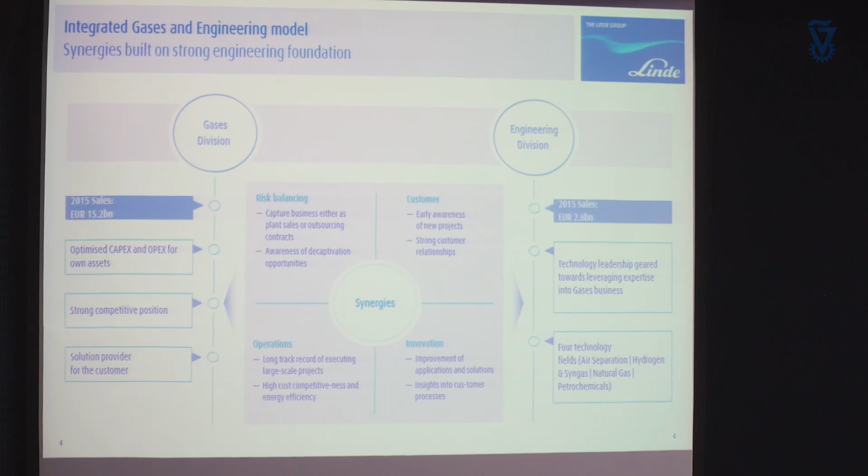And we are, of course, able to tap into the operating experience of our big brother or sister, Linde Gas. Linde Gas has hundreds of plants in operation. And of course, this is a huge data source where we can tap in and take solutions and input for our engineering business.

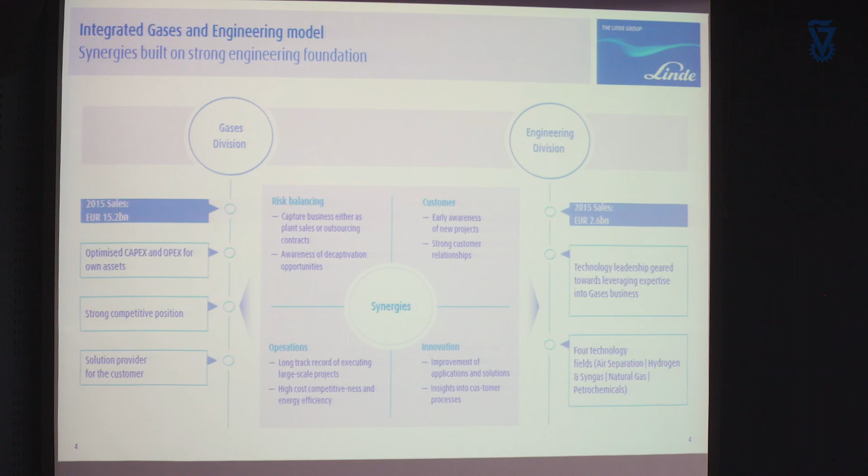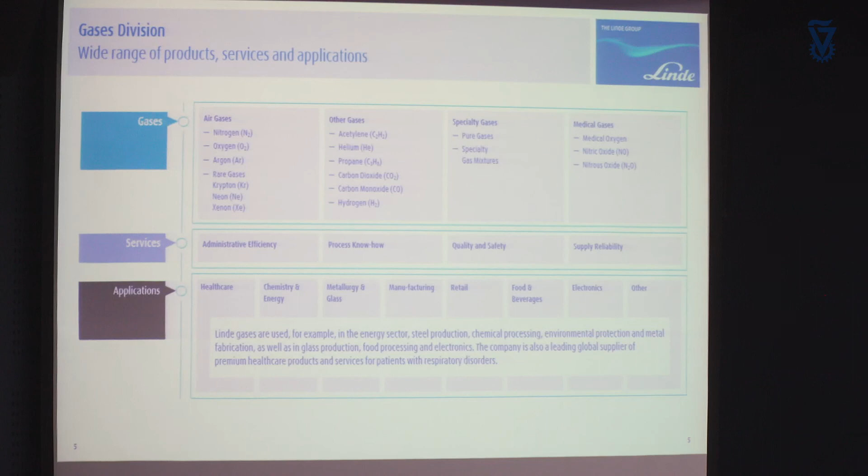Now, it's not only about producing industrial gases, all kind of gases, air gases, gases from hydrocarbons, rare gases, specialty gases, healthcare gases. It's the whole span of the value chain from the gases to the gas applications, which Linde Gas is doing. And you can see here the applications are in all kind of industries: health, metallurgy, petrochemical, and so on.

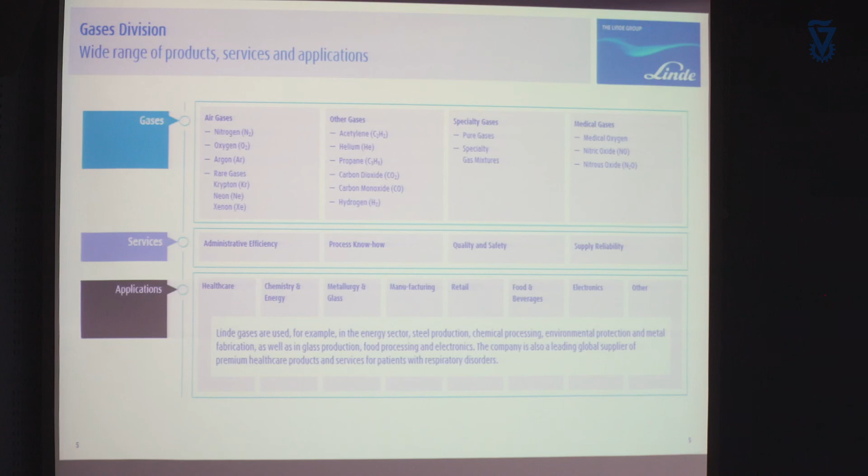Linde Gas has a special department which is continuously working with the customer to find applications for industrial gases in order to improve the manufacturing process of the customer. And these machines, these apparatus to apply these gases, are also part of our business.

Now let's talk a little bit about Linde Engineering, where I'm coming from. We have in Linde Engineering 4 major product lines. This is air separation, Gideon mentioned it in the beginning. This is actually where we're coming from. Professor Dr. Carl von Linde invented the cryogenic process for separating the air gases. Then we have hydrogen and syngas. This is where I'm coming from, mainly hydrogen, but all kind of syngas applications, gas conditioning, and ammonia is also part of it.

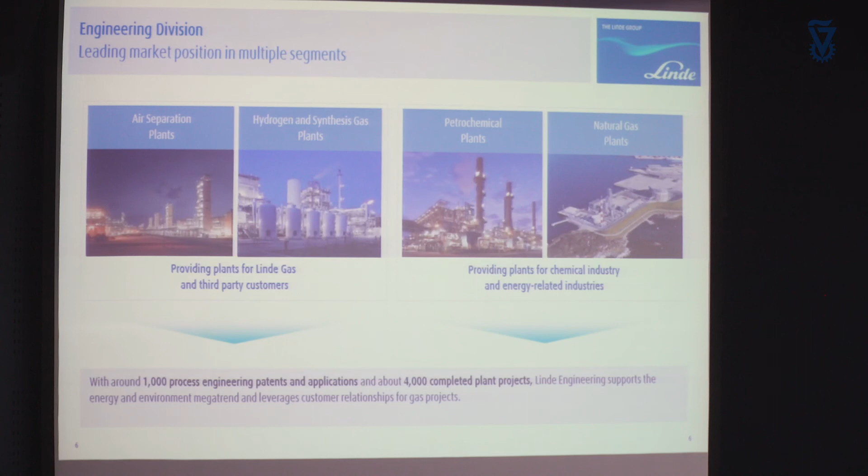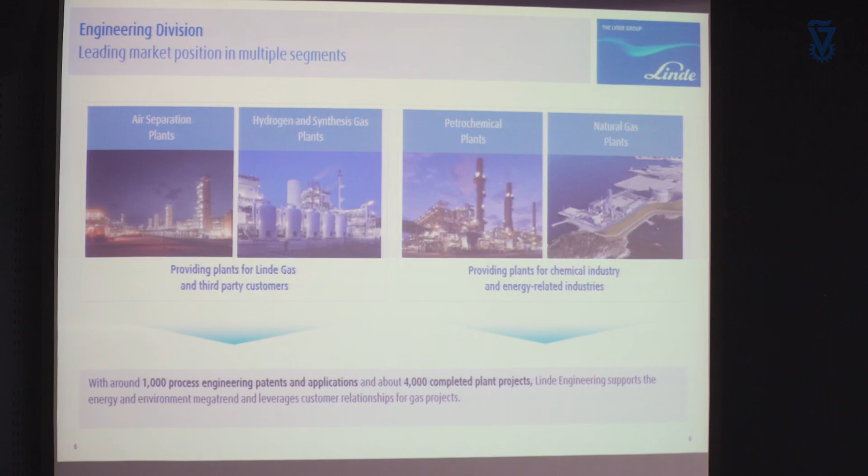Then petrochemical, and our natural gas division doing all kind of gas processing plants, natural gas to liquid, natural gas liquefaction, and so on. We are holding a lot of patents, and we can look back on about 4,000 executed projects over the time of our existence.

Now, what is the speciality of us as an EPC company? EPC, for those who are not familiar with this expression, is engineering, procurement, construction, meaning a general contractor for building plants. What we are proud about is we are not only an EPC company, we are also a technology EPC company.

For a lot of the plants we are building, we own the technologies ourselves. Where we don't own it and we have to find an integrated solution for a huge application, we have access to licensed technology, and we are open to work with each and every licensor. You will see a few examples later on.

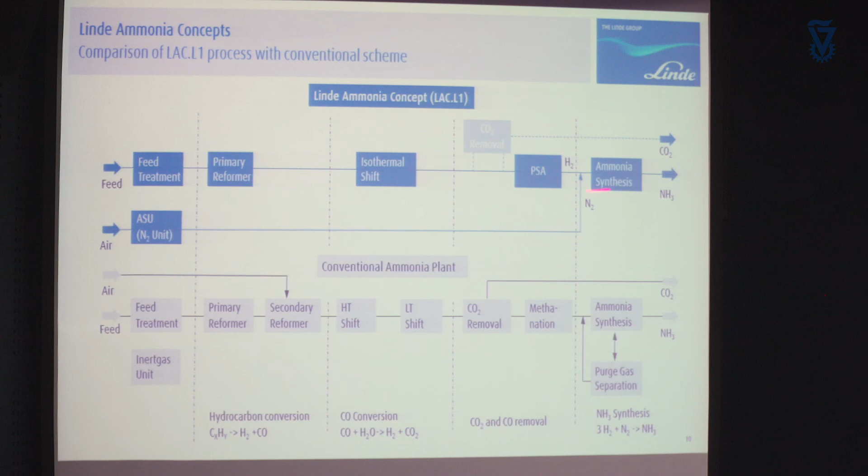Then another nice feature here is the CO2 removal is not compulsory, because the PSA also takes out the CO2. So the process itself is much slimmer, and a very important feature, we bring together the hydrogen and the nitrogen exactly at the point where it's needed, just upstream of the synthesis loop.

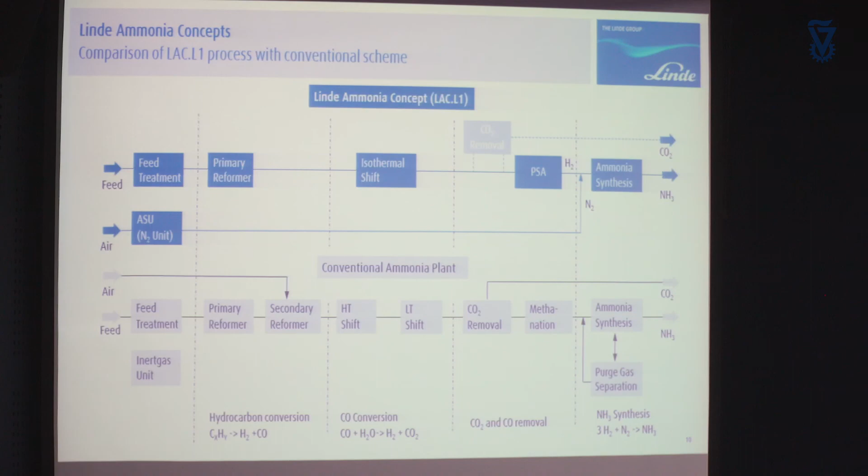Meaning the whole route, of course, has less flow compared to conventional technology. We have less inert gas. We don't have inert gas. It is excess air. What you carry through the whole route, you don't have it here. This means advantage in equipment sizing, in pipeline sizing, of course, and pressure drop. I think we come to that summary later on again.

Well, now I think I have to step down a little bit because I thought I got the monitor here.

Well, the main characteristics, in principle, I said it already. It's an inert-free ammonia synthesis gas. The advantage is we can adjust the CO2 and the ammonia ratio according to the requirements, depending on whether you want to have maybe a CO2 byproduct or whatsoever. It's a very flexible process with respect to feedstock. We can go from very light natural gas feedstock to heavy feedstock like vacuum residue or pitch, for example.

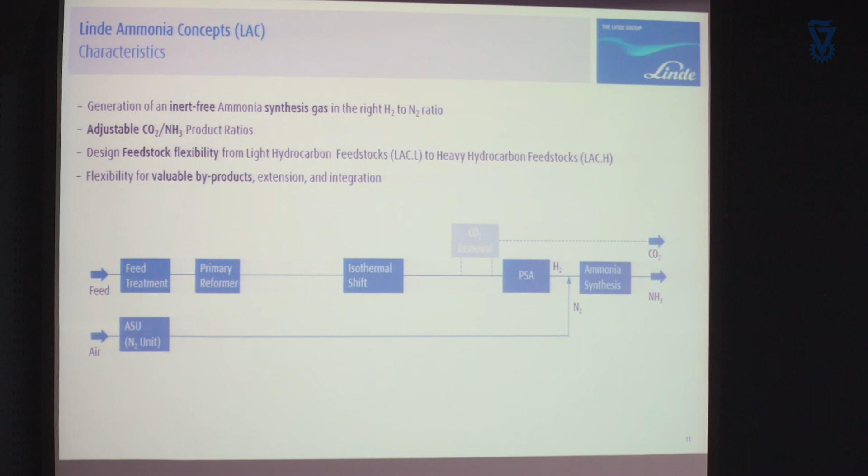And it is very flexible with respect to byproducts, what I want to have. I mean, you see it here. We have the air separation unit. Of course, the air separation unit does not only produce nitrogen. The client, if needed, can also use the oxygen, which is anyway a co-product here. Or we can amend the cold box in order to produce some rare gases. So very flexible.

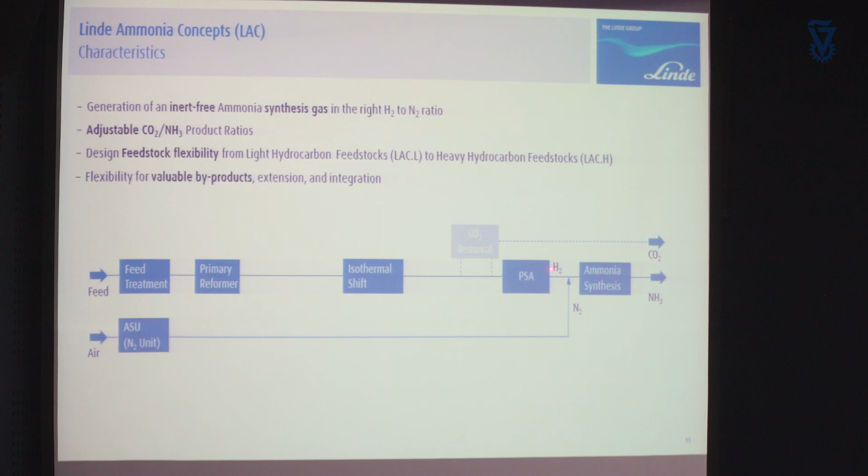Now, with respect to flexibility in plant design, again, CO2 removal, yes, if it's needed. For example, if the client would desire full conversion to urea, we can extract the CO2 and then route it to the urea unit. Pure hydrogen, pure nitrogen, as desired. I said this already. This is in principle a repetition of what I already said.

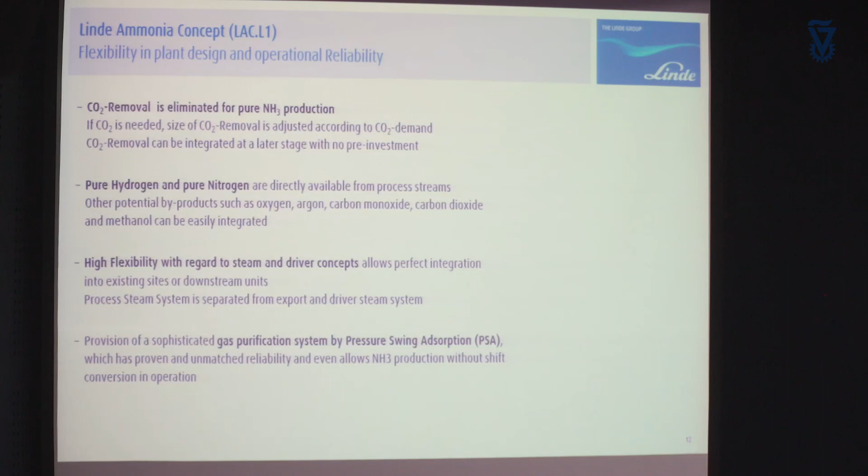The gas purification system, PSA, in our standard hydrogen plant has this additional advantage that you could even run the ammonia plant without the isothermal shift, because the PSA also can take out the CO. And of course, all these features have an impact on cost and energy saving.

As I said right in the beginning, the elimination of three catalytic process steps gives you the advantage that you need less catalyst, about 50% less. This has consequences then, of course, on maintenance, refills, and so on.

The slimmer design of the equipment and the piping, due to the fact that we bring the nitrogen and the hydrogen together just in front of the ammonia synthesis. Less pressure drop, less energy also for the synthesis gas loop. The dimensioning of the machinery is much slimmer than for a conventional plant.

And as a summary, the Linde ammonia concept is the much more direct route to ammonia. So there are savings, the process is very flexible, and of course you have less equipment, less catalyst and so on. This definitely increases the reliability.

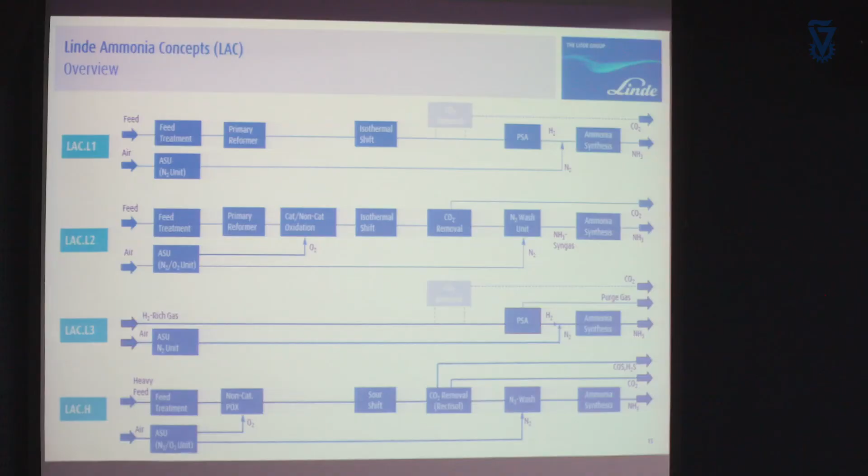Now to give you an overview of the whole family of this process, as I said, we can use it for a huge variety of feedstocks, light feedstock to very heavy feedstock. This L1 process means light 1. This abbreviation is the one we have talked about now.

Then there is the so-called L2 process. If you, for example, want to go to full conversion to urea, there is the CO2 extraction, and there is a second catalytic or non-catalytic step for syngas generation.

Then the so-called LAC.L3 process. This is in principle just cleaning of hydrogen-rich off-gas. This hydrogen-rich off-gas can come from any stream in the refinery, for example, or methanol plant off-gas. This gets cleaned up, for example, by a PSA, and then the hydrogen together with nitrogen goes into the synthesis.

Last but not least, there is the variation with the heavy hydrocarbons. Here, for syngas generation, we are typically with Linde using a partial oxidation unit where we gasify, for example, vacuum residue or pitch, or even coal, of course.

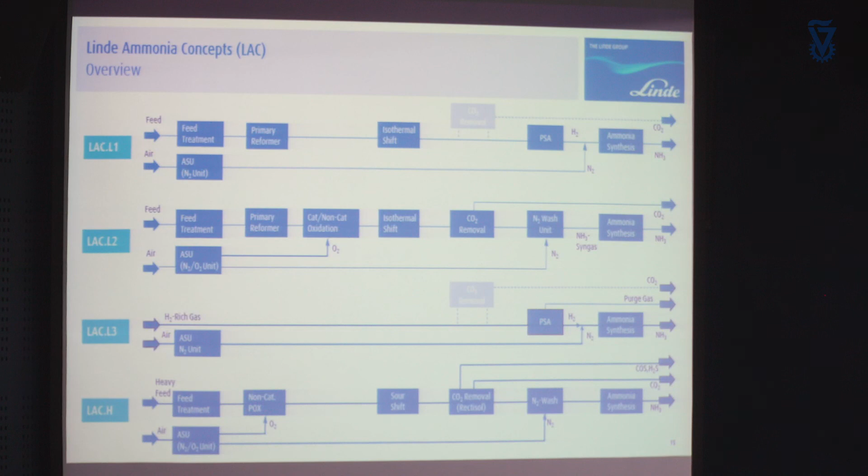Now, to visualize these various process steps, these here are all Linde-owned technologies. Air separation, as we already said, this is where we are coming from, Linde. Then the steam reforming technology is also our own technology, and applied hundreds of times already, for example, in hydrogen plants.

Then the Rectisol wash process is a CO2 removal step, which is typically used in this LAC-H process, meaning for heavy hydrocarbons, for various reasons, but one reason is the pressure level. You have a partial oxidation unit as a front end, which is operating for this kind of feedstock at maybe 80 bars or so, and then in the back end, the Rectisol wash unit is the more adequate process step compared to an amine wash, which we see later on.

Here, a pressure swing adsorption, also our own technology. Then we have here isothermal shift conversion. This is also Linde proprietary equipment. It is actually, how can you say, this does everything. It's a heat exchanger, it's a reactor, it has multiple uses. Sometimes it's used as a reactor, sometimes as a heat exchanger.

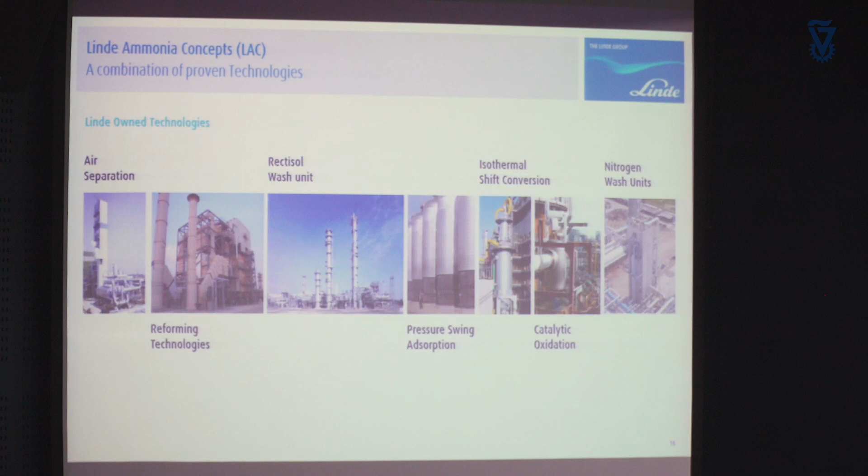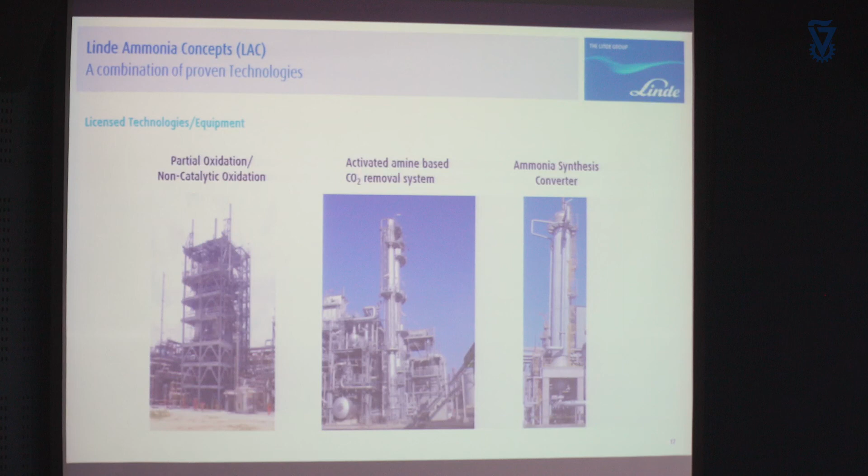Then catalytic oxidation in case of this full conversion, this L2 process. This is something like an ATR, also our own technology. Nitrogen wash unit. This is where we're coming from cryogenic processes. And as I said in the beginning, where we don't have our own technologies, we have access to licensed technology. For example, for a partial oxidation, usually we go with GE, but it could also be somebody else. For the ammonia synthesis, we have worked with Casale, we have worked with Topsøe. We are also open to that. And for the amine wash system, usually also there we can take whatever is and we have worked with whomever is on the market.

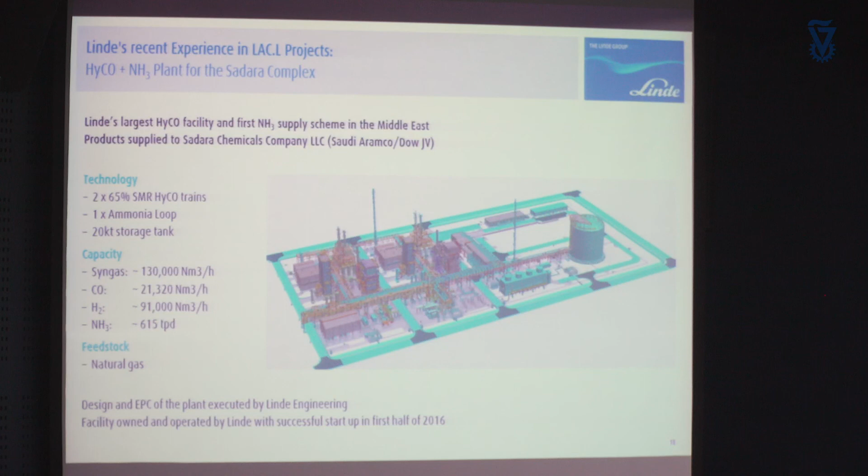This plant you will see later on again. This plant here is stick built. I come to that later. Here a nice picture of it. On the right hand side you see all these units we were talking about before. In principle you have the syngas generation, and here you have the ammonia side of it, the ammonia loop, ammonia reactor, the ammonia synthesis, and the refrigeration, and here the machine house.

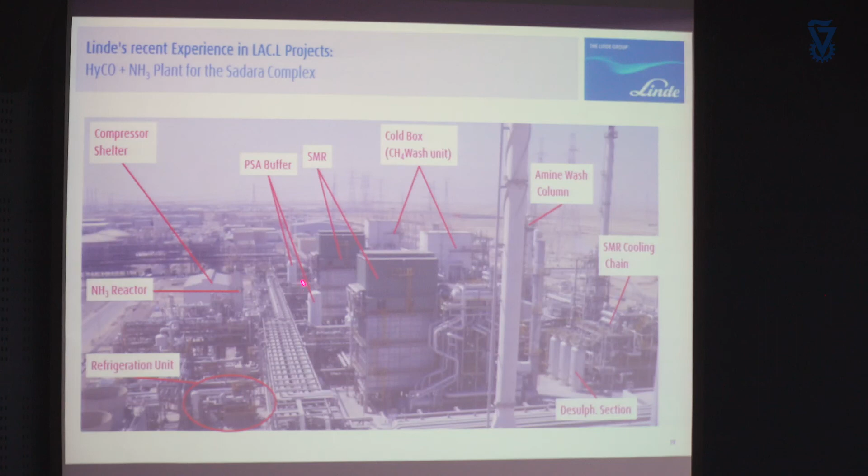Whereas here you have the two big steam reformers, then the two cold boxes of the CH4 wash unit, the towers of the amine wash. This is the SMR cooling chain, so this is where the syngas is cooled down. And here the PSA, you see here just the very tall PSA buffer vessels for the PSA purge gas.

Now, when it comes to standardization, as I said, the core of our process is a hydrogen plant. And when it comes to this smaller scale ammonia plant, standardization is an issue. And since we also play in hydrogen, we have developed over the years a nice portfolio of completely standardized and modularized hydrogen plants. Standardized meaning, of course, always using the same features, maybe also the same vendors, same parts. This means you can shorten and cut back the procurement process. This allows you to be more concise and faster in engineering.

Here on the very left-hand side, this is the smallest of this family, the so-called HydroPrime Mini. It's practically a containerized hydrogen plant going into a 40-foot container, up to a capacity of 300, 330 normal cubic meters. This is off-the-shelf equipment. Then beyond the 300, 500 normal cubic meters, we have out of this family the so-called HydroPrime Mid. I don't like the names very much, but they were established, and we could not change them anymore.

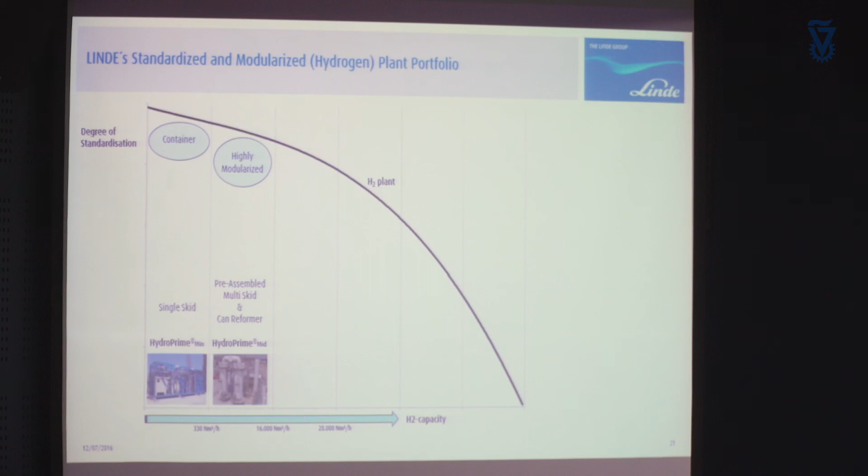These are small, highly modularized hydrogen plants. The complete cooling down train is, you will see later on, nicely modularized. And for syngas generation, these are can-type reformers. We use 1 or 2, depending on the size of the plant. Capacity range, as I said, from 600 to about 15,000, 16,000 normal cubic meters, whereas you can go with one can maybe up to 6,000, 7,000 normal cubic meters.

Then the next one is the so-called HydroPrime Max. This is actually a recent development. We put a lot of effort over the last 2 years into the development of this unit. Of course, from a technological point of view, it's not a new development. But to really standardize it and modularize it, this was an effort.

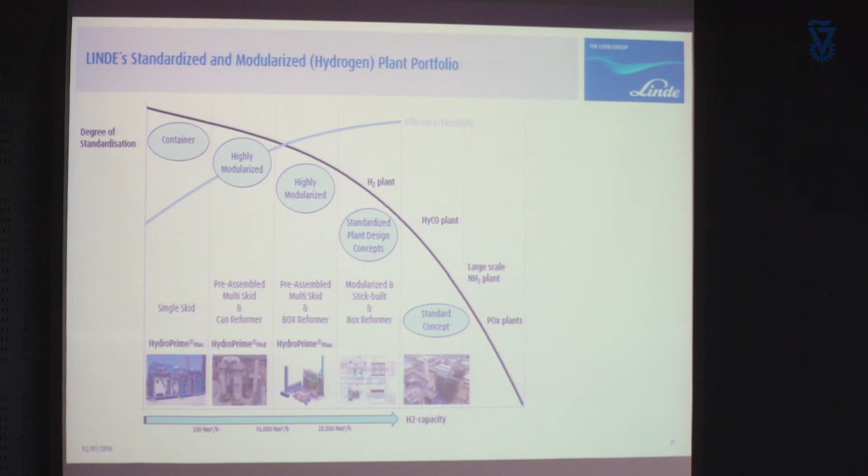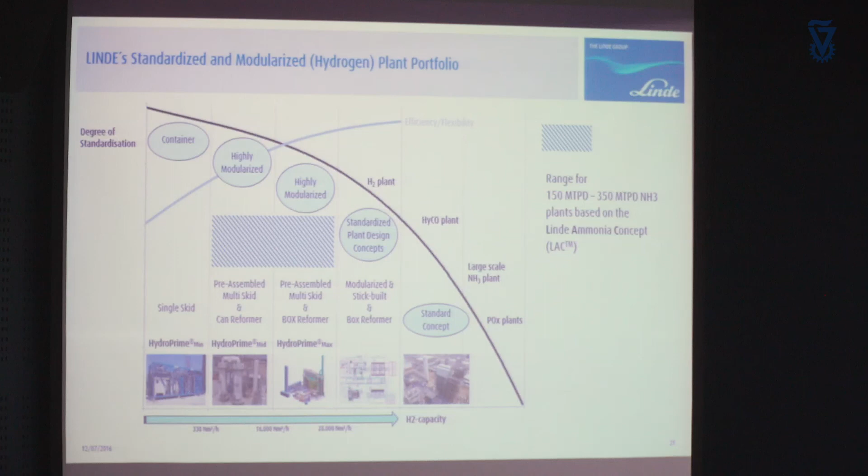I will elaborate a little bit more in just a few minutes. And then the more you come to the right-hand side, the more the plants become customized and bigger. Now, if we talk about small ammonia plants in the range of 150 to 350 metric tons per day, this hashed area here, this would be the ideal application for this kind of standardized hydrogen plant, which would serve as a core unit for these ammonia units.

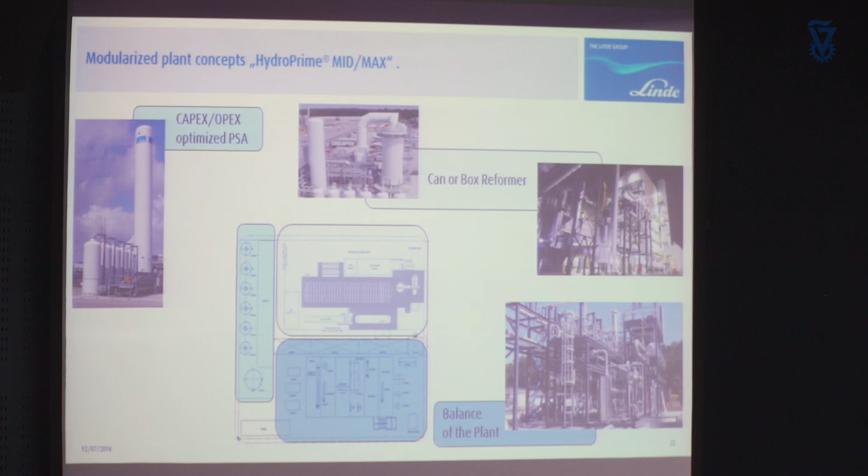Now, this is a typical arrangement here. On the lower end or on the upper end here, you have either a can or box reformer with a waste heat recovery system. So all this down here is a horizontal waste heat recovery. The reformer you see here is a can type. Then this is the cooling structure, an arrangement of heat exchangers where the syngas gets cooled down, and then here you have the syngas cleaning by a PSA unit. And all these are our technologies.

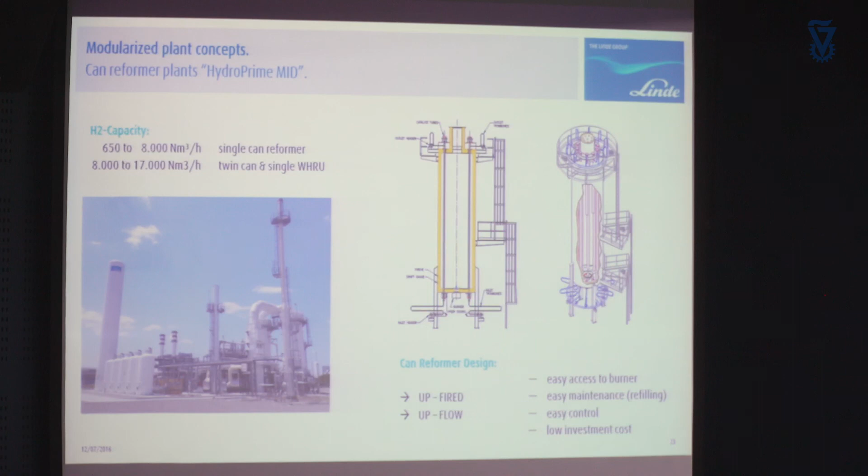Now, this is the HydroPrime Mid. This is the can reformer type. You see here the can reformer. Here in the picture we have two of them. The syngas comes out on the top and then goes into one common header. The whole thing is bottom fired. This has its advantages because it's easily accessible. You can maintain the burners very easily. It's easy to control and has a low investment cost.

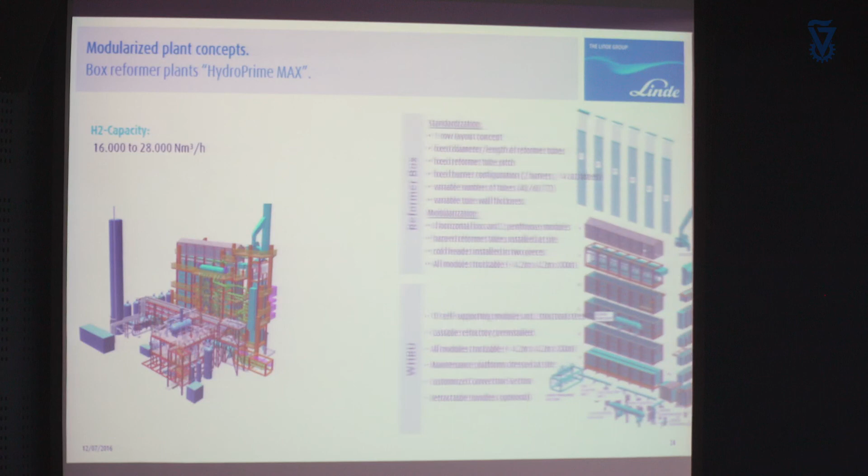Now this is the bigger brother, the HydroPrime Max, and the major effort, as I said before, was really completely modularizing this reformer. Here, it is a one-row concept. So this reformer has only one row, but we are flexible on the harps. You see here 1, 2, 3, 4, 5, 6 harps. Usually, we would use this kind of reformer starting with a capacity of around 16,000 normal cubic meters, a 3-harp type, and then stepwise going up to 48, 60, 72 tubes in order to increase the capacities up to 28,000.

And you see here the box completely, these are 1, 2, 3, 4, 5 horizontal modules, the penthouse modules, already with burners, piping, burner control system, everything installed. And here, the waste heat recovery system, where the flue gas leaves the reformer box. In this case, it is a vertical waste heat recovery. It goes up, and then on top there is the stack. Also, these various bundles, steam generation, feed superheating, whatever is in here, come completely modularized with refractory, everything already in, so on site you just have to put them one on top of the other.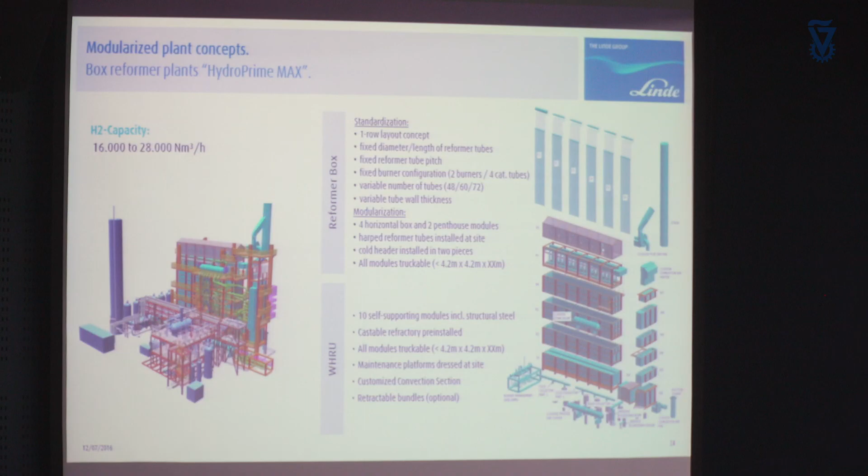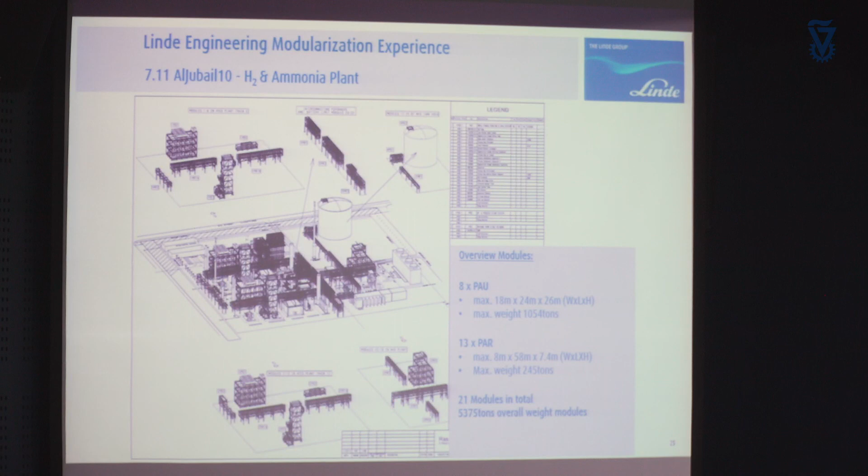Okay, now coming back to the picture you saw before. You remember this Sadara Al-Jubail plant, this Linde gas plant. The concept of it was originally modularized. Then in the end, the plan changed and it became a stick-built plant. And why? We come to that now, because I would like to talk with you a little bit about modularization and why we do that.

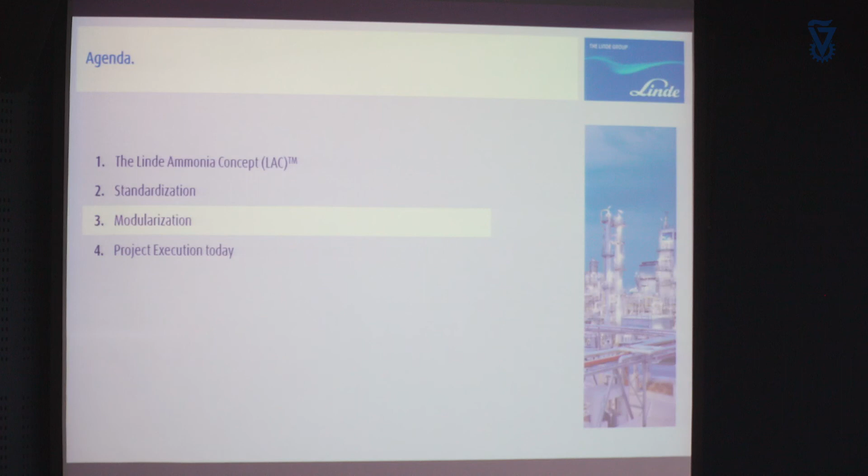There are certain drivers. In principle, modularization is nothing else than de-risking. We want to de-risk the project. Now, risk is money. If you have a lot of risk, you have to evaluate the risk, and this risk goes into the cost of the plant. So in the end, modularization must pay off overall. The whole project must get cheaper. So it's about cost reduction. It's about schedule attainment, but schedule is, of course, money in the end. And it's about HSE, safety.

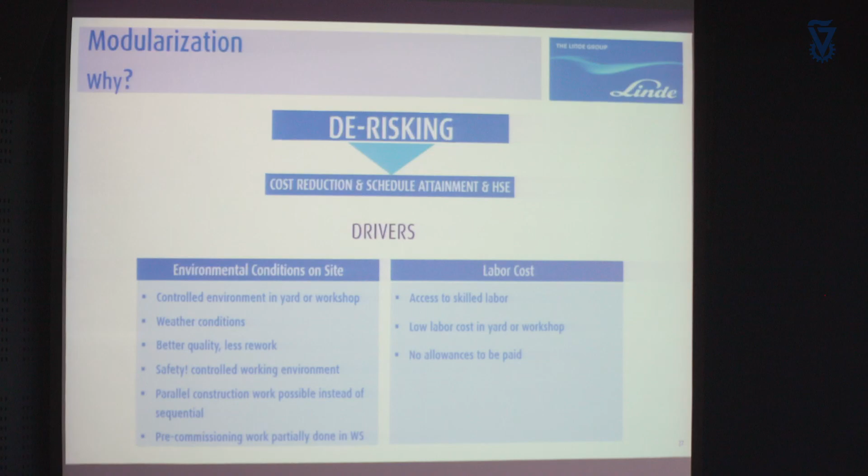What are the criteria? On the labor side: for example, on a construction site in the desert, in Siberia, wherever, do we have access to skilled labor? And this was the driver, the switch, why we switched for this Al-Jubail plant to the decision of stick built, because in the end certain other projects did not materialize in that area, and suddenly there was a lot of cheap and skilled labor available. So in the end it was more cost efficient to build it on site than to do it off-site and modularized. Why? I come to that later, because there is a certain trade-off, of course, with modularization.

Skilled labor is an issue. Cost of labor is an issue. Of course, if you have to bring skilled labor to Siberia, the allowance, then reduced working times and so on and so forth, you have a lot of inefficiency in there.

And on the environmental side, of course, in a yard or in a workshop, you have a much more controlled environment than on a bumpy construction site. In a workshop you're not exposed to the weather conditions. You get better quality, safety. You can control this aspect much better. Already the ground and the floor.

Pardon me? You are limited with the size you can do inside the workshop. Of course, but you will, I come to that, you will see, you are limited, it depends. We do modules up to 4,000 tons. So you see that.

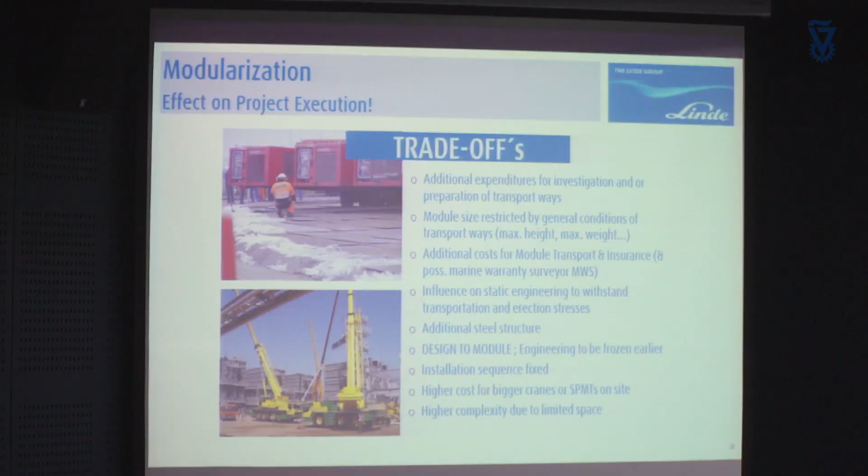You have, in the first place, with modularization and prefabrication, additional expenditures for transport, because you have to investigate the whole transport route. You have bigger modules. The transport costs more because of the module size. Maybe it has to be accompanied. And in the end, you also put more steel because you have to provide for the statics and so on, for transport movements.

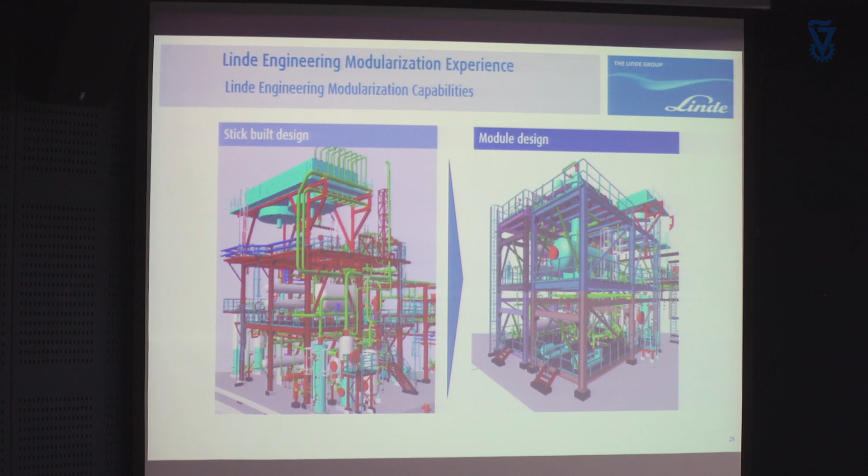This is a nice example regarding steel. You see here the left-hand side is a stick build, the right-hand side is modularized, so you have to put much more steel in there.

Now, what is in this respect the advantage of a technology EPC? We start in the very front, in the process design, already with a view to modularization if we decide to modularize, and we can design the equipment accordingly. It's not very nice to see, but this is a very cumbersome equipment, a deaerator here, which is a T-shape equipment. On the stick build version, very hard to install.

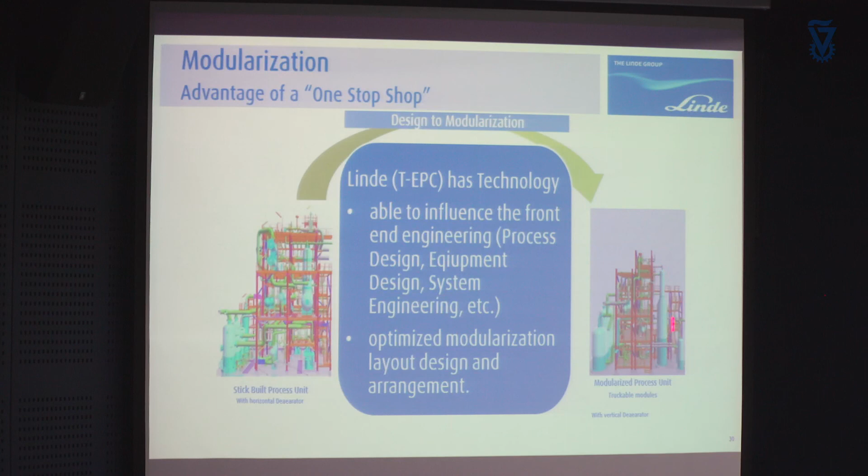We have the ability to design it differently, for example, as a vertical vessel here, which just goes aside the module and will be put on site separately. This is an example just to demonstrate to you that we have various concepts in place for pipe racks, for process units, for super modules in the drawer, which we then apply when it comes to the specific project.

Here an example, because you say limited in size, you can also do an offsite installation. This was an offsite construction site where we built these furnaces. These were 5 furnaces, each one 2,600 tons, in exchange of 12 old furnaces. So we built this offsite, and then within 30 days, we exchanged all the old furnaces by the new furnaces.

And on top of that, even more complicated, you can imagine 5 furnaces don't fit on the foundation of 12 furnaces. So you also have to exchange the foundations, and also the foundations here were prefabricated, precast offsite and then put in. And the whole thing, 5 of these furnaces, was done in 30 days without any day of delay.

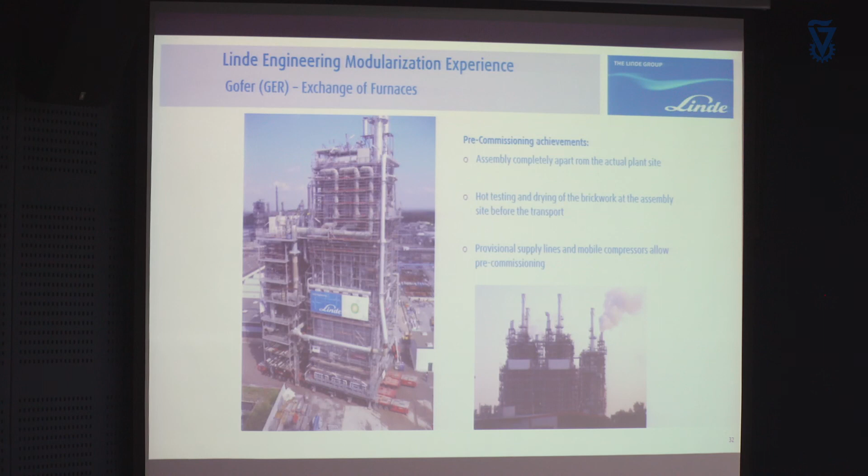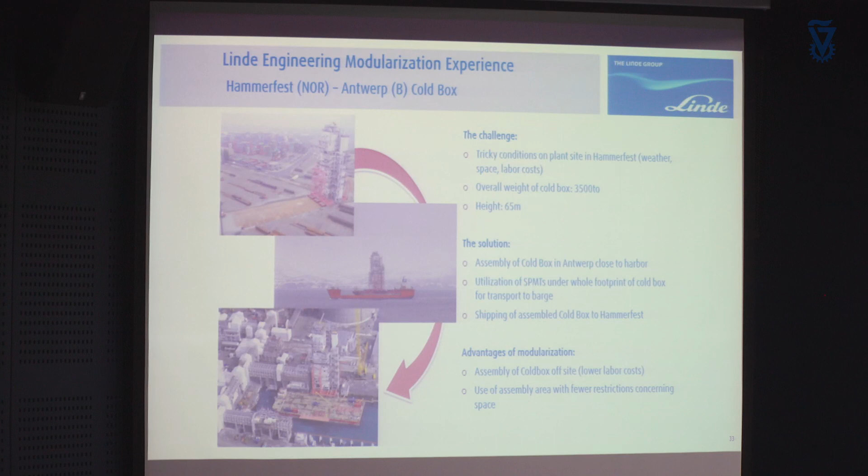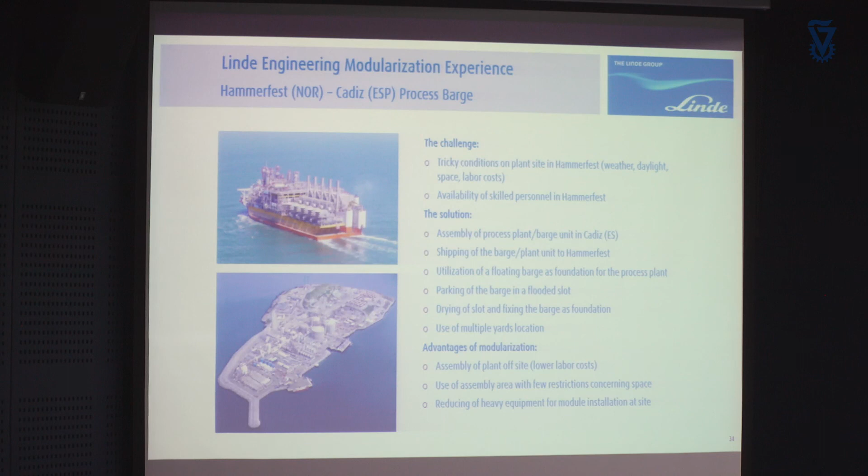The process modules here, this was a gravity-based structure down there. This was a kind of a pontoon, which was lifted up. The plant was built on this pontoon. And then at the arrival, there was an excavated space here where this pontoon went in, and then it was flooded and tied to the ground.

So as I said, the whole plant modularized. Here you see the slug catcher, everything, each single process unit came in from a different part of the world, and finally was assembled in this harsh environment.

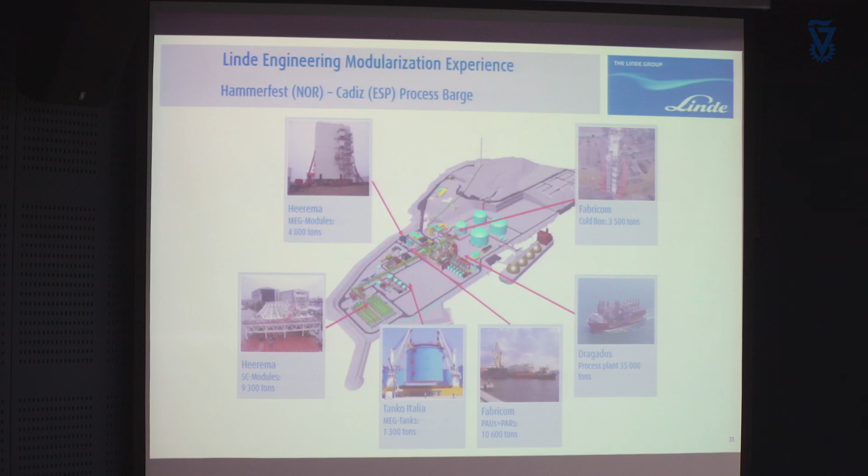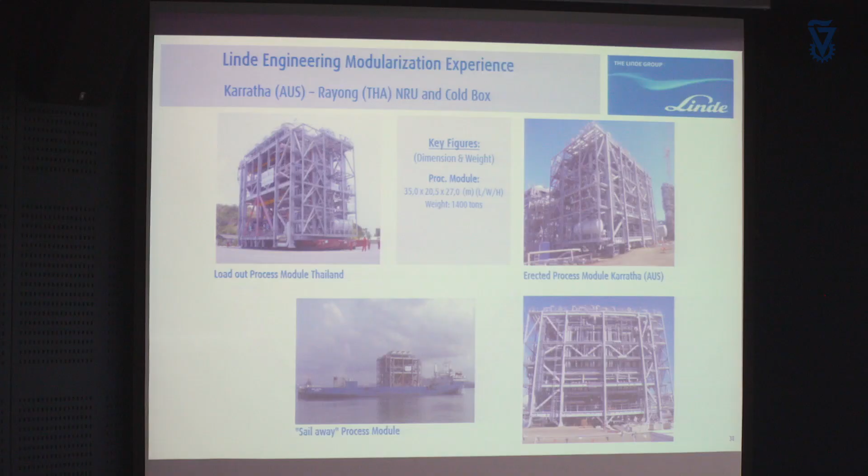Now, when it comes to project execution, this kind of project, these examples, what you saw here, of course, you have to have the capabilities to execute this kind of projects. It is not easy. You go into very harsh environment. You source your equipment and build all over the globe, depending on various criteria. So you have to have a very strong project execution team. And organization, this is what we have.

And as I said, organization is a must. You have to have a global setup nowadays. Normally, you have to also have global engineering hubs due to low cost and cost efficiency. There is almost no client anymore nowadays who is willing to pay $150, for example, for an engineering hour, even though it's German. So we also have our subsidiary in India with about 1,000 people.

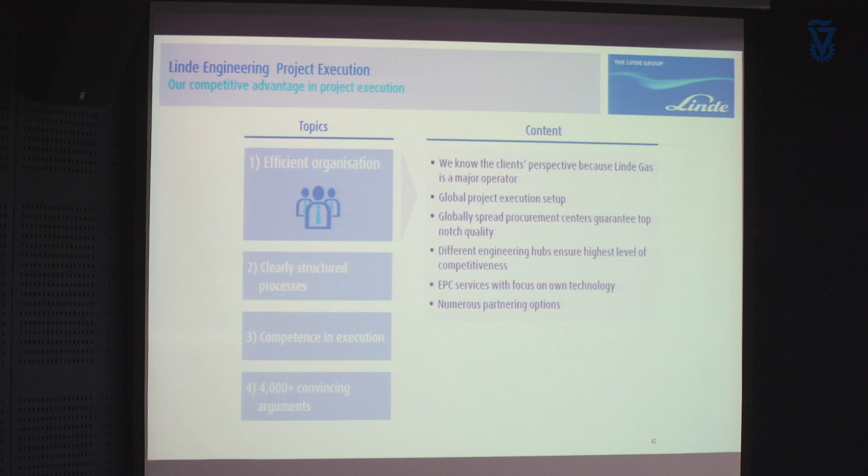Then clearly structured processes. This is definitely something you can imagine where so many parties play together. Things have to be defined quite accurately. We have our integrated management system where these things are laid down. We have, when we work with our subsidiaries, predefined work splits dependent on the product, on the plant, on the location where we go. With the work splits also come the definition of the responsibilities and a very structured change management.

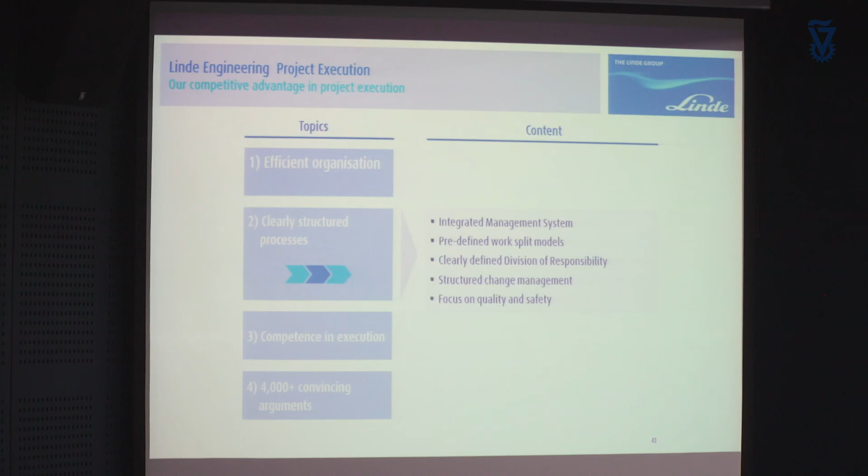This is very important not only towards the client, but also internally, because you can imagine if somebody in Munich changes something and his colleague in India has to pick up the work, he has to know what the other guy was doing. Competence in execution, I just want to say one thing. Project managers, of course, are the key to the success. They have to be strong, they have to know the organization. We have a lot of top project managers who were grown in the organization over decades.

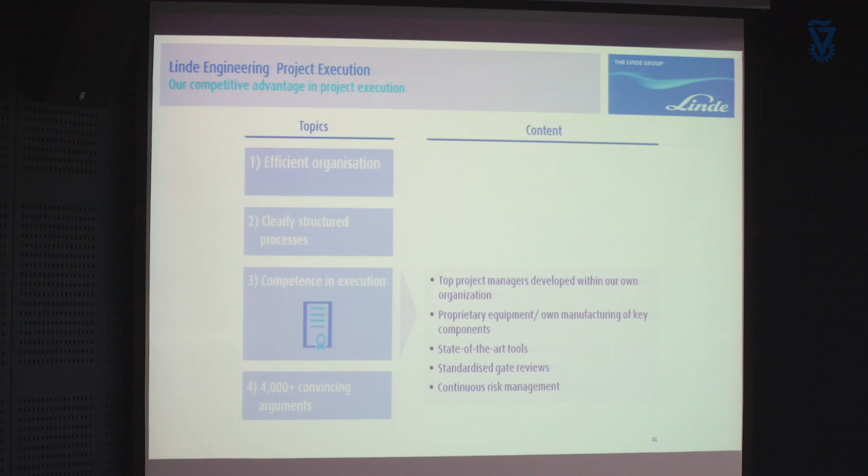And then you need, nowadays, the right tools. And this is something I will come to right in a minute. And with the tools, you have to have the processes with standard gate reviews where you continuously, along the way of engineering project execution, can control schedule and quality of the project. Last but not least, of course, the references of already installed plants.

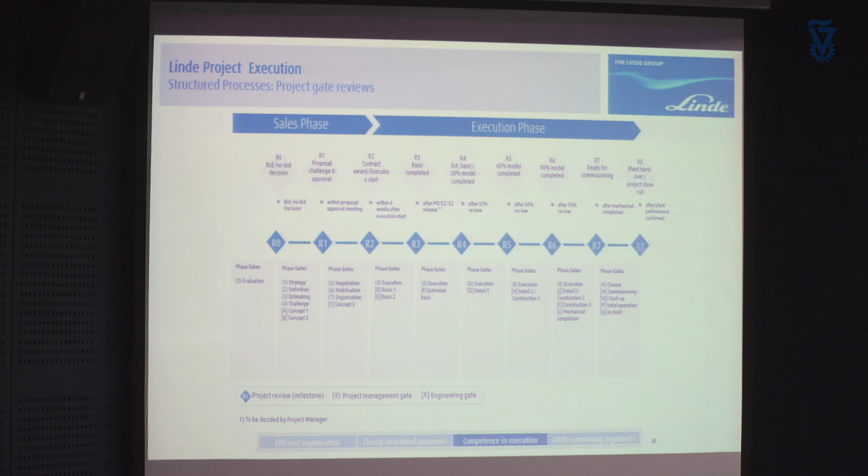Here just an example of such a phase gate model throughout all the phases of the lifetime of such an EPC project, from sales phase to execution phase. And all these intermediate milestones are review steps where we apply certain state-of-the-art tools, design tools, of course, review tools.

And one of our latest tools which we are applying and developing is virtual reality, where we have the possibility to do operator training for the client in a virtual plant without having the risk of getting the plant damaged, without having the risk to expose people to certain hazards. And this is what I would like to show in a small video.

You would have to click on. How long is the video? 2 minutes. 2 minutes? Okay. On the last, if you click on the last icon here, right. And you have later on the opportunity to have a look at this virtual world outside in our booth with the goggles and so on. Here, yes. No sound. No sound. No sound. Okay, maybe then it's better, but then you have to go one after the other.